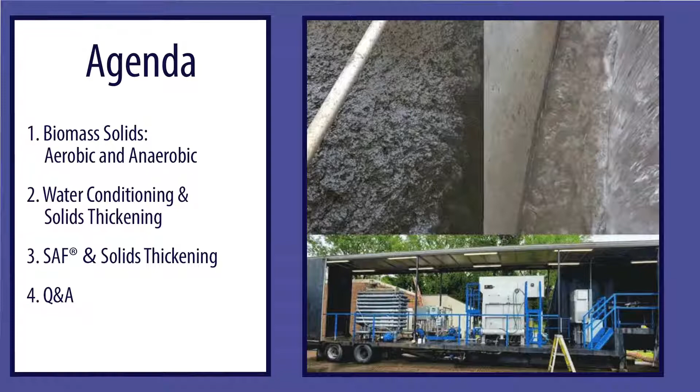Thank you, John. Thank you, Andrea. So our topic this morning is breaking the paradigm of solids thickening in industrial settings. I think first it might be prudent to talk about solids in general. What is that paradigm of solids thickening? John, I'll ask you, what is the paradigm of solids thickening?

Well, I think there's a lot of issues with getting very high solids. Biomass is kind of a difficult thing to treat in high concentrations, and a lot of the digesters and the WAS waste streams get up there in fairly high concentrations. You're sort of limited, especially in flotation, by something we call solids flux. And I believe that we've kind of destroyed that. We have several examples now of very high solids flux numbers, very low chemical consumption to achieve very good results, to where the clarifier may not be a very good option going forward compared to what we could do.

So I think we should probably define this. We actually thicken in several places in an industrial plant. What's often typical is, first you've got primary solids, which are the TSS and potentially FOG coming out of a plant, and that's the first thing generally done with filtration, or what we'd call pre-treatment. That's typically where flotation is applied, where you're clarifying the water prior to it being discharged either to a POTW or a secondary treatment process that the plant may have.

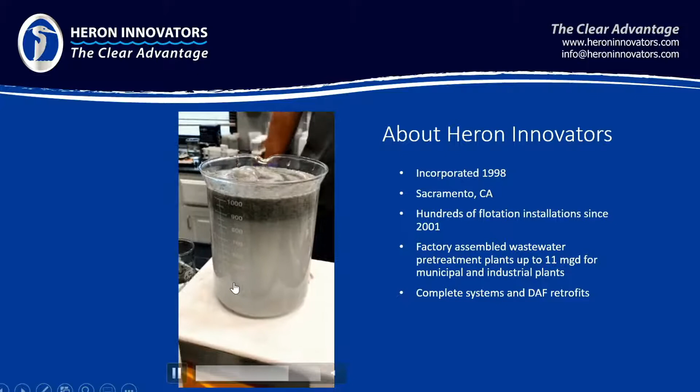What we witnessed was a very high capture rate of solids, a very fast rise rate, and a very stable float. In fact, the environmental manager from the plant was standing next to me, and he said something like, 'Wow, that was really something.' That piqued our interest even further, and we started checking out this SAF technology. This was all several years before I went to work for Heron.

We went to three different plants in three different states, and that company in Arkansas now has nine SAF systems installed throughout their facilities. Some of those were DAF conversions, where the DAF was converted to SAF. We're going to be talking about that more in the coming slides. A number of those were new installations too.

So let's talk about how SAF works. I'm going to start off by defining how dissolved air flotation works, because a lot of times people are familiar with dissolved air flotation and think SAF is similar to that. It's similar to the extent that it is flotation—we're going to float those solids and skim them off with a rake in some type of tank. But that's really where the similarities stop, because the way the froth is formed makes it a quite different process.

The way a DAF typically works is you've got influent coming into the vessel, and you're grabbing water from the underflow or lower portion of the tank, where the water is theoretically cleaner. That's recirculated back into the tank with a recirculation pump pushing against back pressure. Compressed air is injected, and under pressure, air dissolves in water up to a point of saturation. When that recirc stream re-enters the float cell at a lower pressure, you've exceeded that saturation point, so the air comes back out of solution—forming little soda pop bubbles that float the solids to the surface and keep them suspended long enough to be raked off and disposed of. The clean effluent goes out this way.

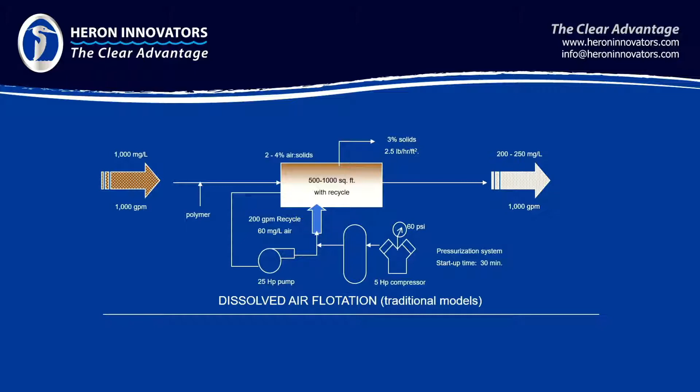So that's DAF. That technology has been around for 100 years, and there are different designs depending on the manufacturer. Some sparge in air, some create bubbles with cavitation—there are different ways to accomplish this, but there's really nothing special about those bubbles.

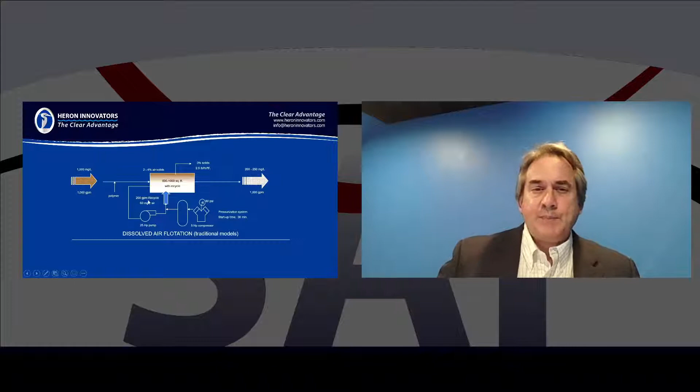Let's contrast that with SAF. Instead of a dissolved air system, SAF creates a charged microbubble froth with a froth generator. That froth is going to be 40% air by volume, compared to DAF, where it's more like 2 to 4% air at the saturation point of how much air you can squeeze into the water. This is made at atmospheric pressure—there's no dissolving of air in the water at all.

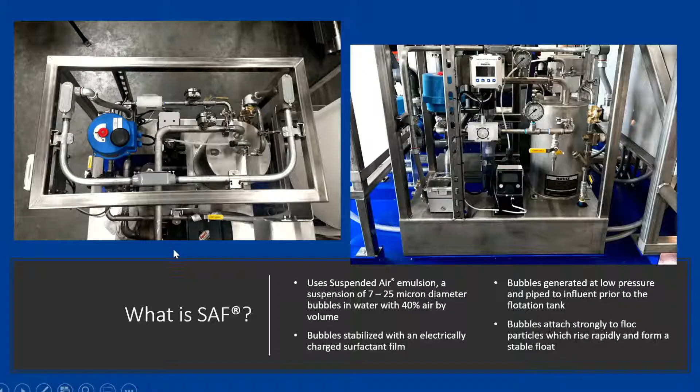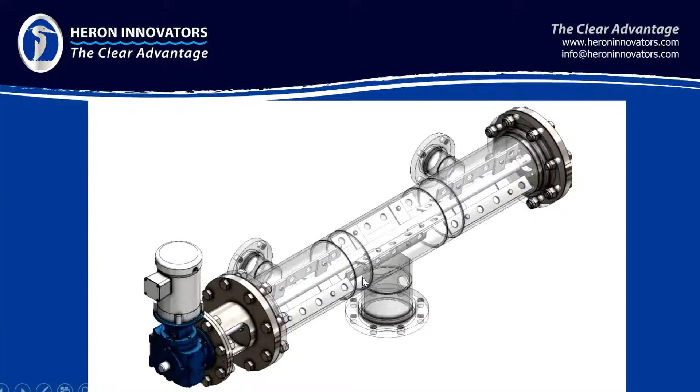So compared to DAF, we've got a froth generator generating this froth that's going to be injected right here, and it's stirred in very gently just ahead of the float cell. In fact, no more air is injected into the float cell at all. Often DAFs continue to feed air in to keep that solids blanket suspended, but SAF does not require that. So there's an air-to-particle reaction that takes place right here: froth is injected at this point, influent coming in, it goes up, and these paddles stir it in to mix those bubbles with the influent and get a good mix, so we can achieve that air-to-particle reaction before it goes into the float cell.

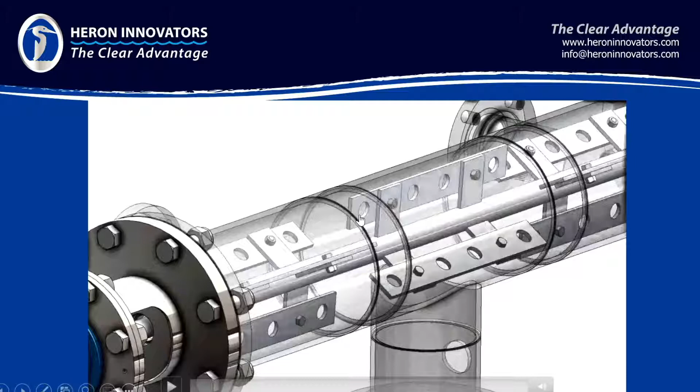So I started to say earlier, these bubbles are much different than DAF bubbles. I'm going to ask John to tell us how they're different. Go ahead, John.

So these bubbles are generated, the bubble is actually an aphron, it was patented in the 70s. The four inventors never figured out how to scale it and get it out of the lab. That's what we brought to the table in the mid-90s. We were able to scale this and deliver pretty much as much air as you want to any process in these aphrons, which are double-walled bubbles running about 7 to 25 microns in diameter.

But they have some huge advantages to DAF bubbles, and one of them is that the wall on the bubble is a surfactant sheath, which helps you overcome the surface tension of the particle. So we are received well by a particle. We get a lot of air on a particle just because of that. And then we also have an electrostatic attraction piece of it that actually allows us to act a little bit like a coagulant even in solution.

Well, that gives us about 1,000 times the affinity for a particle in solution compared to a DAF bubble. So our air is used very well. And because unlike a DAF bubble, where the particle almost resists, we are easily incorporated into the particle, so we don't need as much air on an air to solids ratio basis because of that.

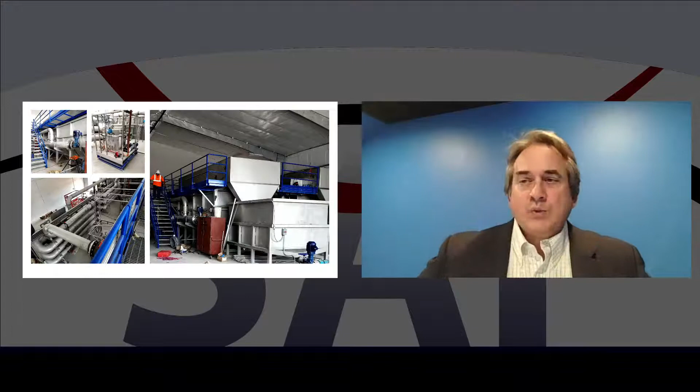All right, so we've had some diagrams, and let's talk about what the actual equipment looks like. Of course, this is a pretty big unit, isn't it John? In terms of SAF, this has got quite a bit of flow capability. Yeah, it's probably third from our largest unit right here - we have two units that are larger than this.

I'm going to go through this diagram, kind of tell you what's what up there. On the top left, looking over the top of a camera to a diagram I have on the wall here - on the top left you can see the floc mixer that Jeff was describing earlier. You can see the gearbox there, and that gearbox is driven by a VFD. The water comes in, you can see the pipe coming in, gets diverted into two nozzles going into the clear floater. Just before it hits that T, right in the middle of the mixer, all the froth is fed right there.

So, on the right side is what generates the froth. That's our secret sauce, right? That generates a foam, a micro froth foam that we deliver to the process.

All the processes to maintain the proper surfactant concentrations and water levels are automated, going off of a flow meter or a float switch. So if you're within the spec of the equipment, adding more or less air is about opening and closing a diaphragm valve, not too different from a water faucet. You can add more or less air. In certain applications, that's very useful, but everything else adjusts upstream of that.

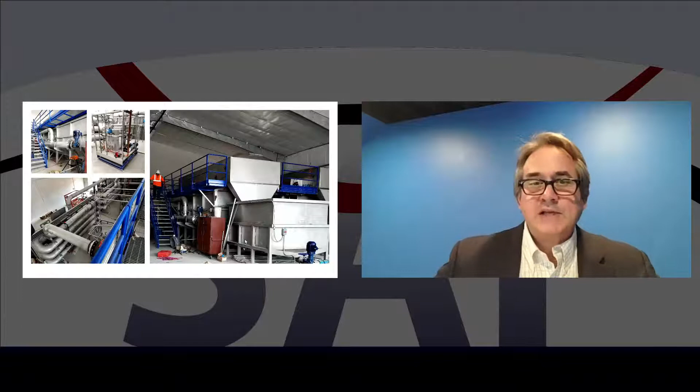It might be worthwhile pointing out that you might be able to avoid downstream dewatering equipment with this. That's a good point, or that equipment could be smaller. Exactly, it's going to take the load off of that equipment, which typically involves polymer, which is more expense. So the more we can thicken that, the less polymer that needs to be used downstream.

Exactly. So before we get into this, we're going to talk a bit about converting DAFs to SAF, which, as I said earlier, is probably more than half of our business. We've got a video of this particular client. Let me preface by saying that one of the gentlemen, it's been a little while since I've seen this video, but I do know one of the gentlemen - he was working with us when he was involved just with wastewater. He's now moved up to being chief engineer for the company, but he'll be talking a bit about his experience with SAF. So if you can play the video.

I'm Seth Walters, I'm the environmental director for Simmons Foods. I am in charge of environmental operations and compliance. We met Heron about 3 years ago, and we started to learn about the SAF technology. Some of the claims they were making were new to us. We didn't fully understand the technology at the time, and we thought that based on previous operation experience, some of those things might be hard to achieve. But we've since learned that they're capable of that.

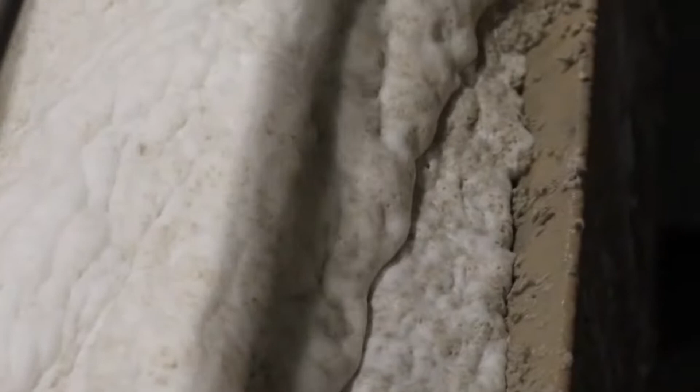We have also retrofitted SAFs that were previously DAFs. What we saw is the design throughput went from 1,200 gallons a minute to over 2,000 gallons a minute. Similarly, we have another DAF in Southwest City that was also retrofitted, and in that scenario we were actually floating biological solids, and we were limited on the amount of solids we could float per square foot of the DAF. Once we converted that over to a SAF, we were actually able to achieve somewhere along the lines of 200 or 300% more solids floated per square foot, which allowed us to put more water through the system.

So at both ends of the system, our primary solids removal and our biological solids removal, we were able to use SAF technology to increase our design throughput while increasing our water quality coming out of the equipment. Enough that we bought these two new ones. We then converted two existing dissolved air flotation units to SAF units. They're all working fine, and because of that, we purchased two new 2,000 gallon a minute units for a new facility we're building. We just received a small 50 gallon a minute unit for a plant we have in Milan. So the fact that we keep buying them means that we do think they do the job.

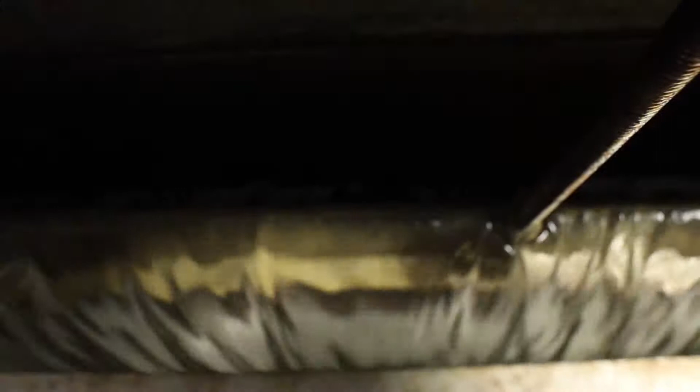My name's Kashua Thor, and I'm the environmental process engineer for Simmons Foods. My job is to assist and oversee environmental compliance and regulations. As the company is growing and demands are increasing, SAFs have been able to be 6 times more efficient than the previous processes. We've been able to use our existing equipment to convert to the SAF to meet production limits, and we've also been able to save chemicals used. With the polymers used for wastewater, we've been able to reduce that, as well as remove other components of wastewater such as phosphorus.

Oh, we're done with the presentation. I'm sorry, I did not know we were done with the presentation. I thought they were going to talk a little bit about that video. Again, I apologize, we are all very new to this. Let's go to questions and answers, shall we? Good, okay. So it looks like - I'm sorry, Jeff. Yeah, sorry, I've got more to say. Oh, see, I knew it wasn't me. All right Jeff, so why don't you go ahead? I'm sorry, for those viewers out there, we apologize. We tried to fit in another video and it got us off our game here. So all right, Jeff, go ahead.

Yeah, you bet. Can we put our slides back up on the screen? Let me know when you can see them. They're good, there, we got them. You bet. So we talked about converting DAFs to SAF, and there's actually two of them in this particular plant, which is in Southwest City, Missouri.

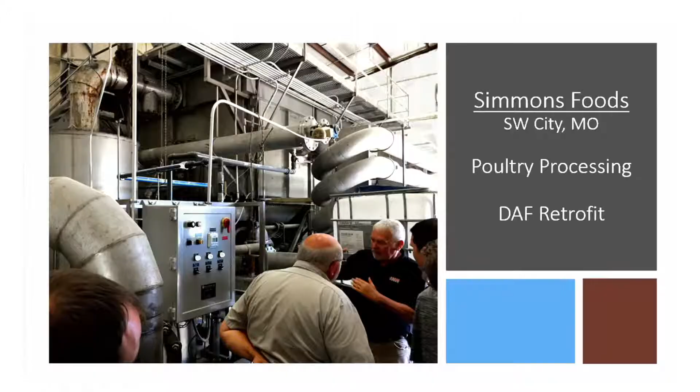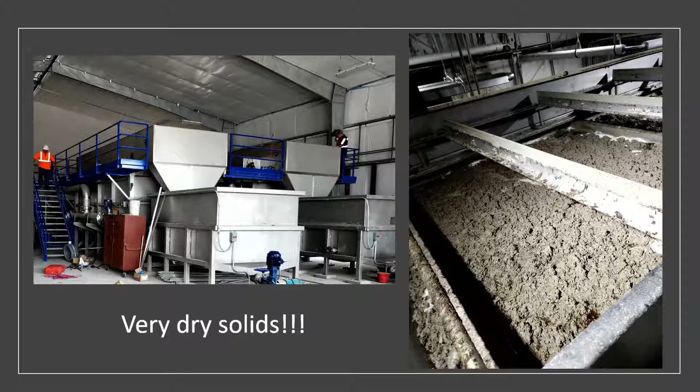In fact, one of our other presentations we did for WEFTEC, we got into this in some depth, what they saw as far as cleaner water coming out the back end. Higher performance, a whole lot of savings in chemistry and energy, to the tune of the conversion paid for itself in much less than 6 months. It's probably less than 4 months.

And then I know they said they're hitting somewhere around 5% solids, which Andy, the environmental manager, said is just a function of the company that takes the solids away. That's the limiting factor. They don't want the solids any thicker than 5. So aerobic solids, John, what have you seen us do? What have you seen us being able to hit?

Hi Jeff, thank you. I think the highest number we've seen come out of aerobic solids applications is 10%. I think 4 to 6 comes with no polymer or just a little polymer. 6 to 8 is, you're actually trying to dry the solids, and you're going to add a little bit more polymer. You're going to spend some more time dewatering. And 8 to 10 is maybe a function of the status of the aerobic solids themselves, whether there's been some level of digestion going on. But we've seen numbers on occasion as high as 10.

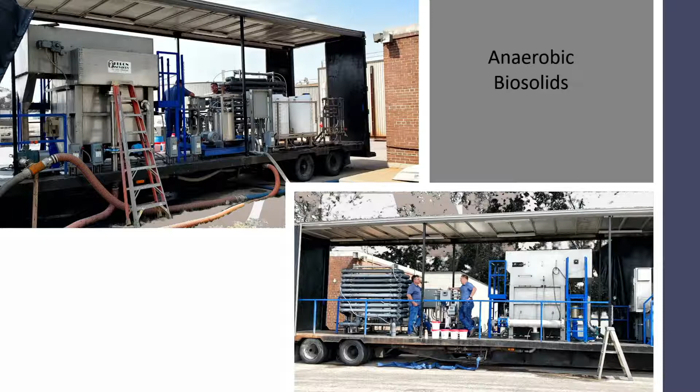Solids are raked off here, go this way to the solids pump, which you can see right here. I'm hoping you can see my cursor moving around. Yes, we can. And then of course the clean water is coming out in the water launder right here and being drained off. So this particular trial was on anaerobic biosolids, and this was coming at us at around 5,800 ppm of TSS.

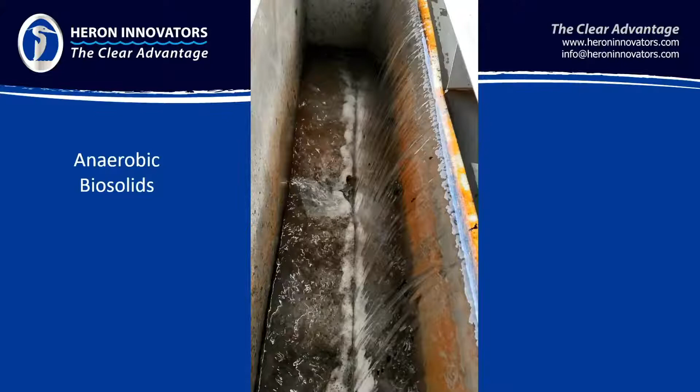And I think I've got some videos of this. Yeah, so here we go. That was the water coming in. Here's the water going out. I wish I had a shot of what this water looked like coming in, because it was very dark. And 5,800 is pretty heavy loading. So let me see if I can start that again.

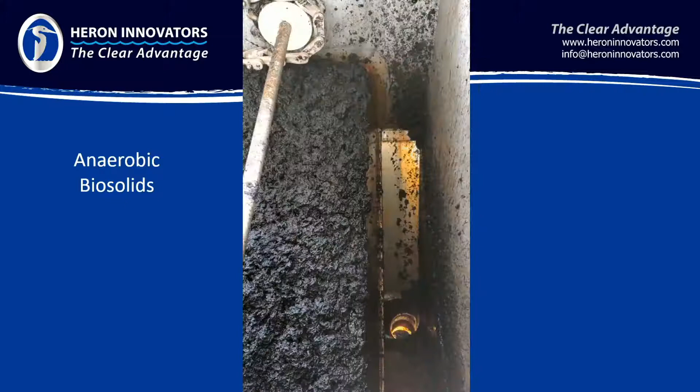Oh, here we go. And again, I do apologize for the delay in the computer. Is that starting up? There we go.

That's what we wanted to see. You can see how thick the solids are getting. And of course the rake's not running right now. It was on a timer. And then this is the beach end.

John, you want to describe what else we're seeing right here? Well, the solids are accumulating. I mean, there's probably a 6-8 inch bed of solids that are accumulating on there, and they're dewatering. They're draining the best they can. In fact, if you saw earlier in the video, some of that water is just being captured on the top. Here you go, the skimmer is just starting now. So you can see how it's breaking off.

It's fairly thick solids. At some point, people don't want it any thicker because they have trouble pumping it to its final destination. But this is, I think, right around 5% solids. And you know, we could have left it up there longer. We could have added a little bit more polymer and got it even drier. And you can see how thick a bed that is.

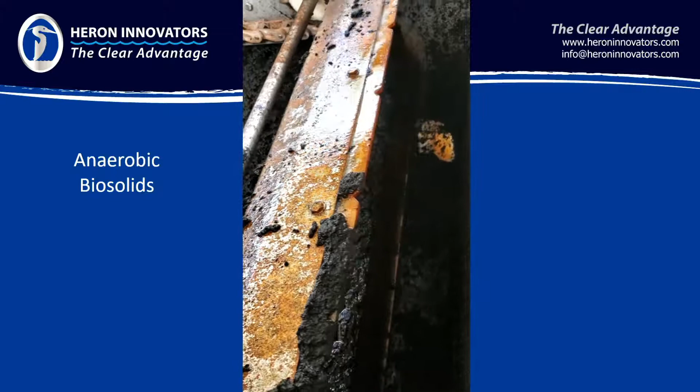So I think during this trial we were averaging 30 pounds per hour per square foot. I know, Jeff, that when you were playing with it there toward the end of your stay, after I had left, you got it up to about 45, 46 pounds per hour per square foot. We have additional data from other sites where people have loaded them at really high solids flux rates. And this is all at modest polymer consumption rates, oftentimes half or a third of what the DAF would use to do the same thing. So the surfactant coated Aphron is particularly good at engaging these particles and floating them.

Yeah, so the solids flux, the amount of solids that we can handle per square foot, on this particular project was a big part of this when you look at the capital costs and 20-year operating costs. Of course, capital is the upfront part of that. And not only were we somewhere around a half to a third of the physical footprint, and this was a pretty large application, I think full scale about 2,800 gallons per minute. So pretty good size system that's going to be going in.

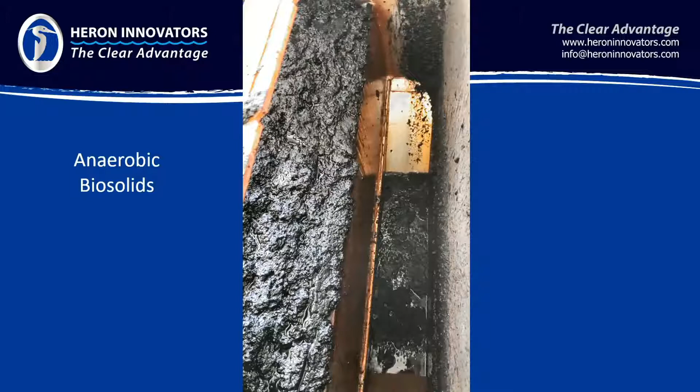But not only is our system 2 or 3 times smaller, but the building it has to go in is also 2 or 3 times smaller. So considerably less capital expense, but ironically, the decision to go with SAF wasn't based on capital at all. I maybe didn't mention, right next to our trailer was a competitive DAF being trialed in parallel to us at the same time. And the engineering firm said they never got a quote for the capital after this trial.

So the decision was made solely on operating expense, on how much polymer the system was going to use, what we proved we could use. And that was somewhere around 25, maybe to 40% less polymer, which worked out to more than $250,000 a year. So over 20 years, that's a lot of money. And then of course the other thing was just how easy it was to use. And John, I'll let you talk about that a little bit.

Well, I just remember the quote from when it was being presented to the board: the operator said not only did we achieve all these great results with such little polymer, but this was, quote, stupid easy to run. We actually left maybe a week before the trial was over, and the operators and the engineering firm ran the trailer. They were playing with it, trying to challenge the polymer numbers we'd given them and get particularly low polymer. They'd disrupt the process, then turn it back up.